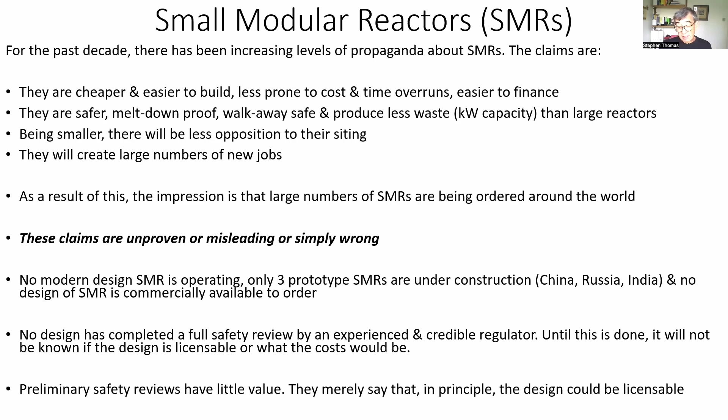So what are small modular reactors? It actually covers such a wide range of sizes and technologies that the term is not really very meaningful. The IAEA talks about SMRs as reactors of between 30 and 300 megawatts of electricity. Reactors that are smaller than that are often called microreactors. In terms of technology, you can divide them into 3 categories. The first category, and the one relevant to us today, is smaller versions of the dominant existing reactor types. So pressurized water reactors like the PWRs at Dukovany and Temelin, and boiling water reactors, BWRs, the second most common type of reactor worldwide.

The second type is technologies that have been around for more than 50 years, but they've only been built as prototype or demonstration plants. For example, fast breeder reactors, high temperature gas-cooled reactors. These prototype and demonstration plants have all been at best problematic. They have not worked well. The third category is reactor designs that have been talked about for a long time, for 50 years or more, but they've never actually been built, even at prototype scale. So an example might be molten salt reactors or lead-cooled fast reactors.

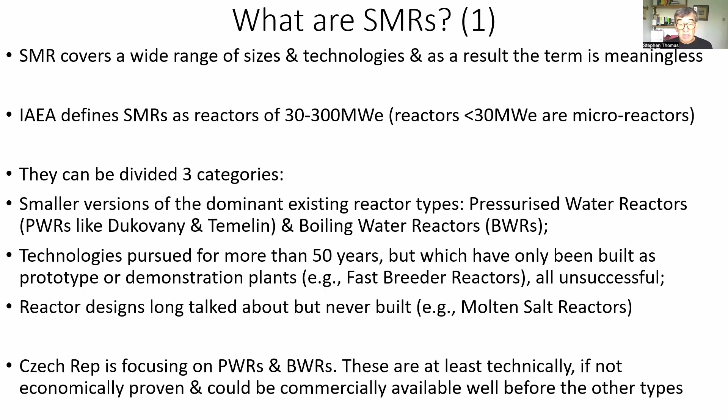Czech Republic is focusing on PWRs and BWRs, and these are at least technically, if not economically proven. So there is at least some chance they will generate electricity reasonably reliably, and they will be available long before the other 2 categories. Although the definition of SMR is 30 to 300, the smallest is about 80 megawatts, and some are larger than 300 megawatts. For example, the Rolls-Royce SMR design is 470 megawatts, which makes it about the same size as each of the reactors at Dukovany.

The claims on the costs being lower and the plants being easier to build are based on production line manufacturing of components, modular construction, so that site work is simply bolting together the modules. So most of the plant comes on the back of a lorry, and there is limited work to do at the site itself.

The claims on improved safety are down to use of passive safety systems, so that in an accident, natural processes rather than engineered systems bring the reactor back under control. So something like convection rather than an emergency core cooling system. Some of the designs are integral, which means that the major systems are all within the reactor vessel, which makes them less vulnerable and allegedly safer. And some of the reactors are built underground and housed underwater, so that again adds another layer of protection.

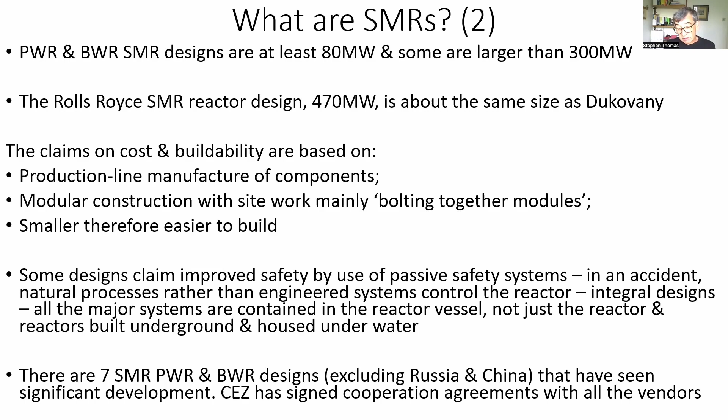There are 7 SMR PWR and BWR designs that have seen significant development, and ČEZ has signed cooperation agreements with all of them. What those cooperation agreements mean in practice is hard to know. I suspect it doesn't mean much work on the part of ČEZ. That would be a huge diversion of resources. So let's quickly go through the 4 of them.

Let's start with the GE Hitachi BWRX-300. This was announced relatively recently, about 5 years ago, and it's a scaled down version at 300 megawatts of a very large reactor, the 1,500 megawatt ESBWR, and has passive safety. This large reactor did get design approval by the US safety authorities, but it was never marketed because it was uneconomic, and it's hard to know why scaling it down would make it cheaper.

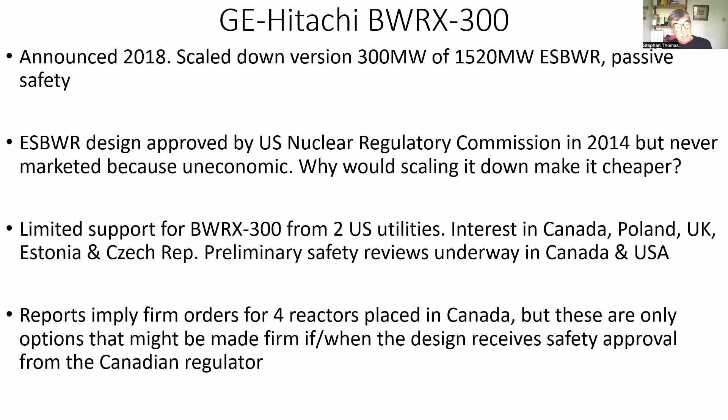There is some support for this design from 2 US utilities. There is some interest in Canada, Poland, UK, Estonia and Czech Republic. Preliminary safety reviews are underway in Canada and US, but not a full-scale safety review. If you read the press, you will believe that there are firm orders for 4 reactors of this design in Canada, but these are actually only options that might be made firm if the design receives safety approval. So again, there are very misleading press reports.

The next design is the Westinghouse AP300, announced this year. It's a scaled down version at 300 megawatts of the AP1000, which is a 1,170 megawatt reactor. It's the advanced passive 1000. It's a modular design relying on passive safety.

8 of these large reactors were sold, to USA and Canada, but all of them suffered major construction delays. They were at least 6 years late, and they were up to 4 times over budget. And 2 of those 8 actually had to be abandoned after 4 years of construction.

As it's only been recently announced, there isn't much interest in it yet.

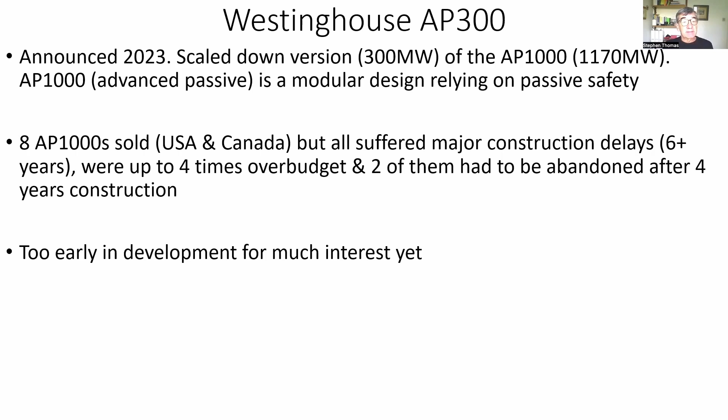Most of the publicity is on the NuScale design, and this dates back 20 years or more, and US government funded research. A company was set up in 2007, and a large US engineering company became the major shareholder 4 years later. It started at 35 megawatts, then it went up to 40 megawatts, then up to 50 megawatts, then up to 60 megawatts, and it's now 77 megawatts.

It was originally designed to be built in clusters of 12, but as it's got scaled up, those clusters have come down, and it's now being offered in clusters of 4 or 6 reactors. It's an integral design relying on passive safety. It's built underground, and it's immersed in a water pool.

The 50 megawatt design did go through a comprehensive safety review in the USA starting in 2016, but by the time this process was complete in 2021, the 50 megawatt version had been abandoned, and it had been scaled up by more than 50%. Of course, that's a major change in the design, and the regulatory review is effectively back to start, and the review started earlier this year.

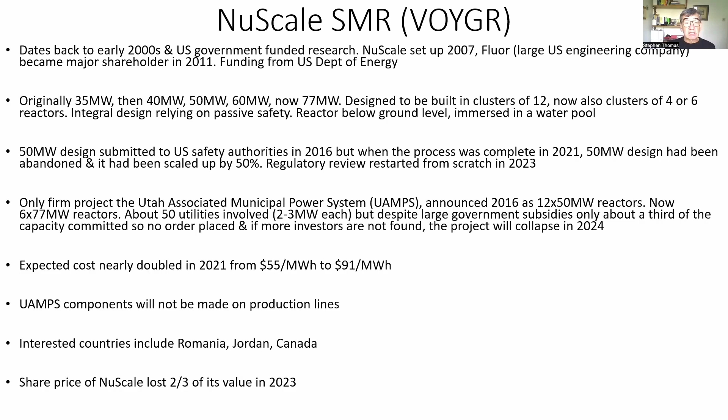There is interest in countries like Romania, Jordan, and Canada, but because of the delays with the UAMPS project, the share price of NuScale is plummeting, and it's lost 2/3 of its value this year, and I suspect NuScale is in deep trouble.

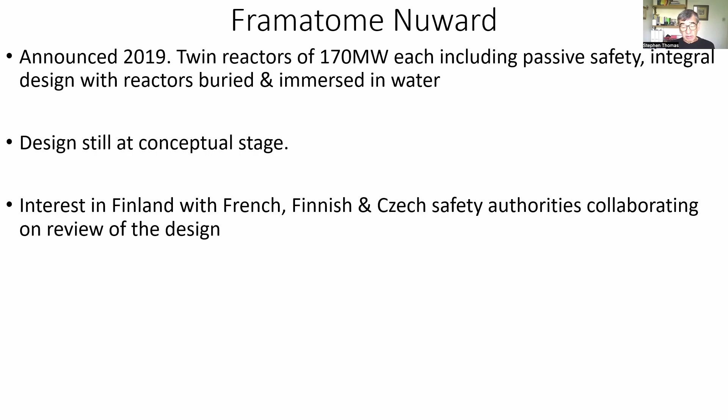Then we have the next design, the Framatome Nuward design, which was announced 4 years ago. This is twin reactors, 170 megawatts each, passive safety, reactors buried underground and immersed in water. The design is still at a very early stage, and there is a little interest in Finland, France, and the Czech Republic, but again, it's too early for much interest.

Then we have the Korean reactor, the SMART. This has been under development for a very long time, 100-megawatt reactor, integral reactor with passive safety, but there doesn't seem much interest outside Saudi Arabia. Not much seems to be happening there, so I think this is probably not a serious contender.

I think the history of the Westinghouse AP reactors is interesting, as it shows how ambivalent the reactor vendors are on reactor size. Around 1990, Westinghouse announced the AP600, which is about a 600-megawatt reactor. And they claimed at the time that they had looked for scale economies in large reactors, but found there weren't any. So they scaled it down to 600 megawatts. It was assessed and approved by the US Nuclear Regulatory Commission in 1998, but by then it was clearly uneconomic and it was never marketed.

So Westinghouse scaled it up to 1170 megawatts, the AP1000, to improve the economics. It was submitted to the US Nuclear Regulatory Commission in 2002, and although it was only a scaling up of the AP600, it took another 9 years for the NRC to give it approval. All 8 orders, 4 for China, were very expensive.

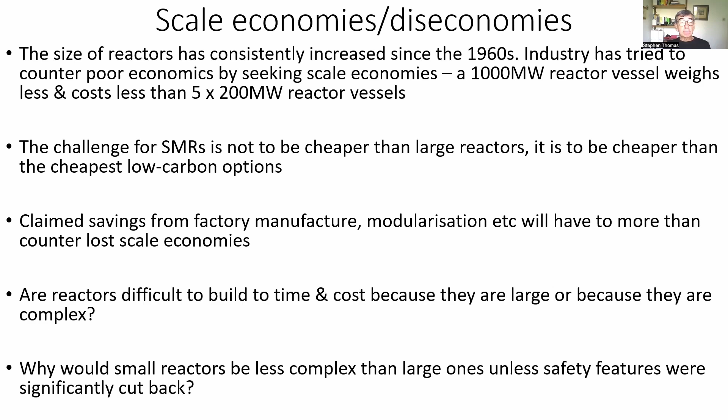What about production lines and factory manufacture? You're meant to conjure up an image of a rolling production line like car manufacture, with cars going down the line, many cars being produced per day, a machine doing a specific piece of welding, for example. But the Rolls-Royce production lines would be designed to produce only 2 to 4 reactors per year. So this is really nothing like the production line as you would imagine it.

Production lines are expensive to set up and they're inflexible. And if they're not fully loaded, then you either have to close them or mothball them, and those fixed costs are not being recovered. And if the design needs to be changed, then you need to change the equipment on the production line.

There is also the inflexibility, and Rolls-Royce wants to make its first reactor on a production line, because if it's not produced on a production line, we won't know what the economics of production line reactors are. But if you set up a production line and it's only producing 2 reactors a year, by the time the first kilowatt-hour of electricity is generated, at least another 10 or 12 reactors will be in various stages of manufacture. So the British government would be taking a huge gamble on the design being economically and technically viable. It can't just build one and see if it works well. It's going to have to build 12 of them.

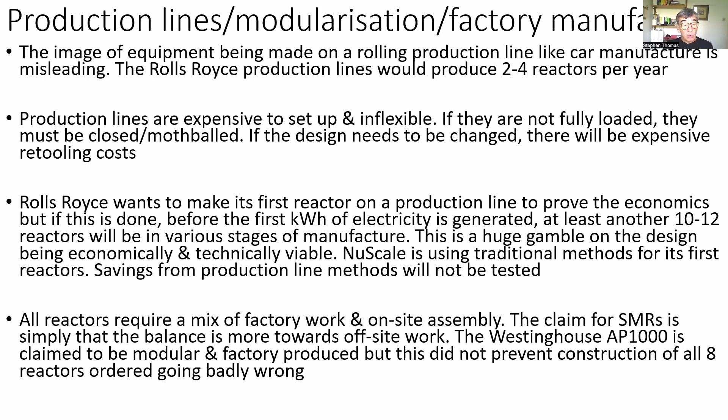So what are my conclusions? Well, reactor vendors always give the impression that their products are much closer to market deployment than they actually are. And you get the impression from them that they could start building these reactors tomorrow. This is very misleading. No SMR has completed a comprehensive safety review. Only 2 of them have actually started a safety review, the NuScale and the Rolls-Royce one, and those are about 3 or 4 years away from completion. And it would be reckless to order an SMR until you've actually got that safety certification.

You'll read lots of talk about memoranda of cooperation, letters of intent, etc. But these are essentially worthless as indicators of real orders. Producing new reactor designs is risky, expensive, and takes a long time. NuScale has been under development for 20 years. More than $1 billion has been spent on it, including very large amounts of US public money.

And all the vendors will be looking for large amounts of public money and guarantees of orders if they're going to proceed with bringing their designs to the point when they can be commercially ordered. The traditional vendors don't have the funds to do this without the assurance of strong orders. Westinghouse and Framatome are still emerging from bankruptcy.

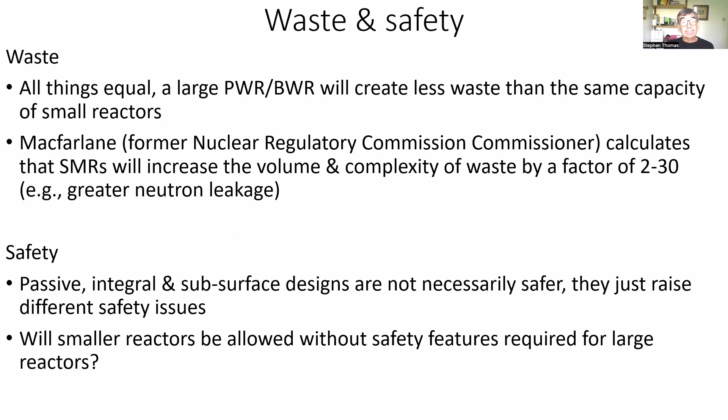New companies like Holtec, startup companies, will need partners and public funding if they're going to develop their designs, because nobody is going to buy a nuclear reactor from a company with no history in producing large nuclear power plants. There are things I could say on waste, safety, and jobs, but perhaps we can leave those to questions.